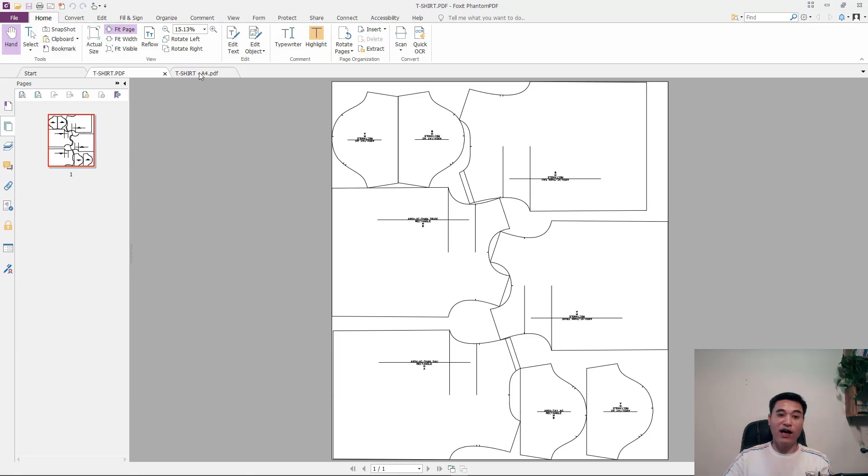And once we've finished assembling, this diagram will be at a 1-to-1 scale, just like how we designed it on the computer. Whatever size we designed, when we print it out and piece the A4 sheets together, it will come out exactly like that.

Hello everyone, today I will share with you how to print a pattern from the Gerber software onto A4 paper using a printer. There is a simple method to do this.

We will start by opening up the specific layout design that we need to print on the standard A4 size printer. After printing out the individual A4 sheets, we can carefully piece them together to form the full pattern exactly as we want. This method is for those who do not have a plotter. But if you have a plotter, then there's no reason to use this method, right?

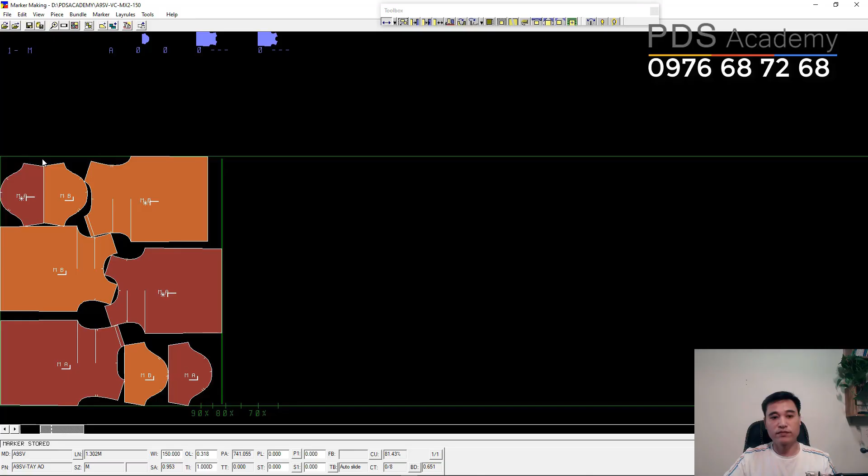So now I will show you how to do it. You will go to File. Then we go to Send to Plot. Once you click on the Send to Plot button, a configuration window like this one will pop up on your screen. From here, you can choose the specific folder path where your PLT file will be saved.

We will set a path for the .plt file, also known as the .hpgl file, to be saved to any location we want, all right? Then we go into View. You will go into Plot option. Here we will check the .hpgl option. Remember to check this box.

After that, you will click on Default to choose a path. Here, for example, I will set the file to be saved to the desktop, and you can try doing the same. After that, we will click OK.

Next, if you want the file name of the diagram you print to be long, you can check the long file name option. Then we will click OK. After we click OK, you will see that the export section now has a path leading to the desktop. Can you see it? Here it is.

Next, you will select the annotation section. In this section, you can determine how the notes will appear on the details of your project. Click on the button on the right-hand side. From there, you can choose any type of annotation that you have been using for your work up until now. Here, on my computer, I have this option, so I will select this one. If your computer has a different name for it, you can choose that instead.

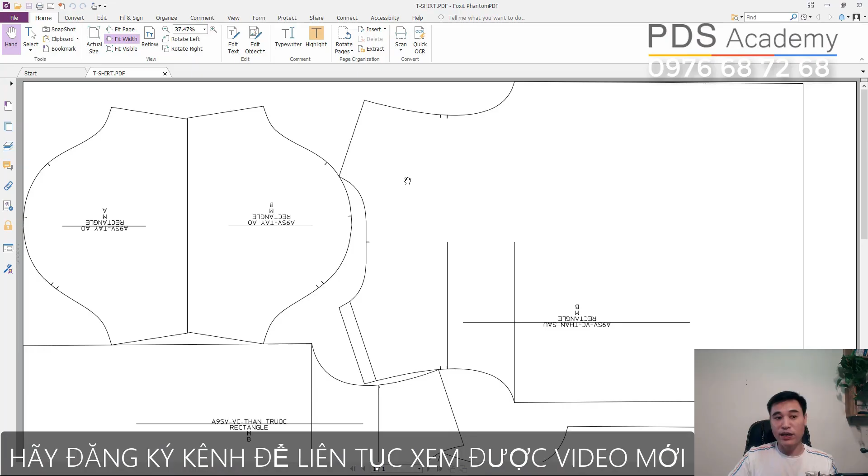So right away, you can see here, right outside our window, there is now a PDF file, and its scale is exactly 100% compared to the scale in the Gerber software. So now, how do we print this file so that it becomes multiple A4 sheets that we can piece together? Because this is a 1-to-1 scale, we can't print it directly onto A4 paper, right? So here's what you should do.

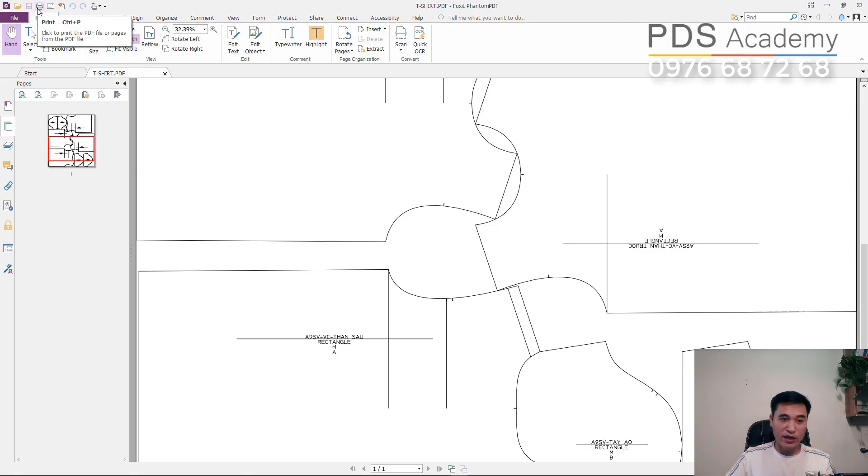You will click on this printer option, and you can see it very clearly right here. There is a label that specifically says Foxit PhantomPDF Printer. Look here, it has this label, so click on it. Make sure to check this specific box.

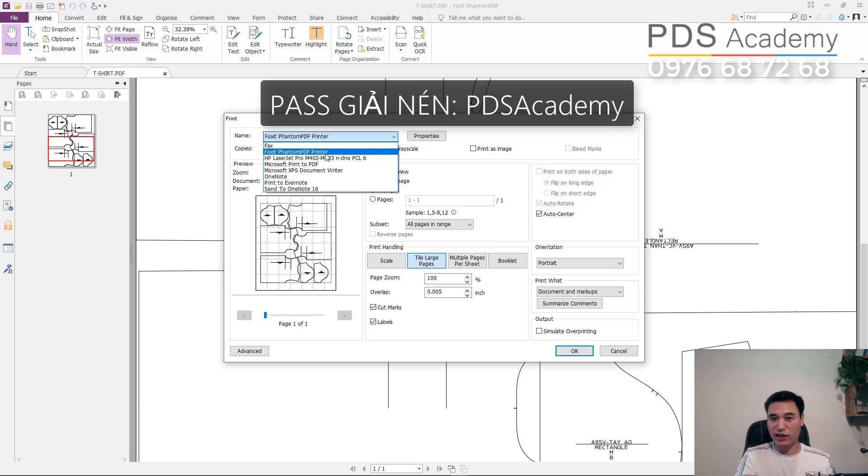And now we're going to select Foxit Phantom. Look to the right and select Property. And here, choose the Layout section. Select the paper size you want. For example, if you want A4 paper, then select A4 paper. You can choose the unit as either centimeters or inches. It's up to you. And the size of the A4 paper will appear here.

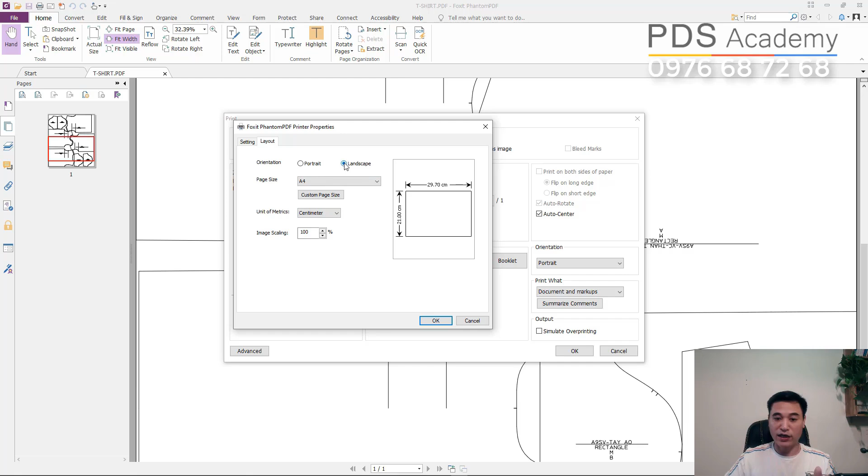And if you want to print with the paper in landscape orientation, just check this option and your paper will be set to landscape, okay? And now click OK. Next, make sure to check all pages so that it will print all the pages. Continue down to the section below and check this box. This will split your diagram into A4 sheets. Remember, you have to check this box.

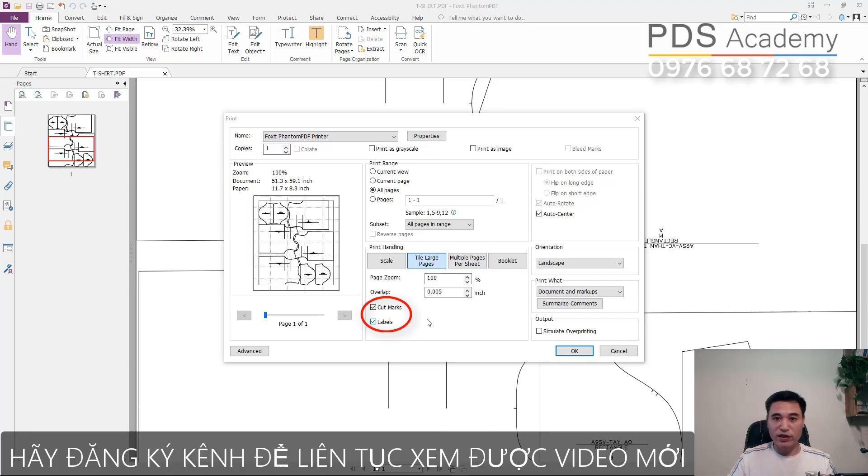And if you want each A4 sheet to have alignment marks so they fit together, check these two boxes. Check both of these boxes. And here you can count how many A4 sheets you need to print and assemble together to create this pattern diagram. Do you see that? Next, you just need to click OK, and please wait a moment.

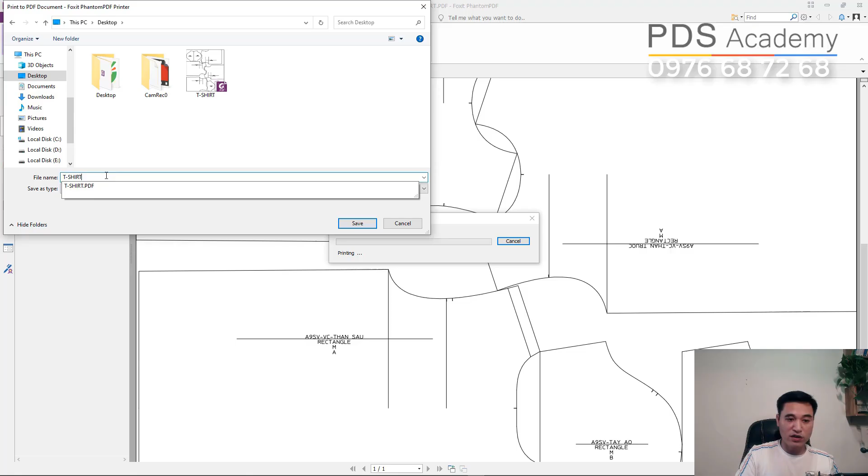A new window will automatically pop up for you to save this file. For example, I am going to save it directly to the desktop, and I might name it t-shirt, but as an A4 file. I can save the file just like this. Then I click Save. At this point, you can see that a brand new window has appeared here. And now we'll click on the View section to properly display all of these pages.

You might want to zoom out a bit. You will click the button to zoom out a bit so we can get a better overview, right? So we need this many sheets of paper. See, do you notice? With this many A4 sheets combined together, that's how we get this diagram. I'll zoom out a bit for you to see. See, do you see it now? This is the diagram that summarizes all the details.

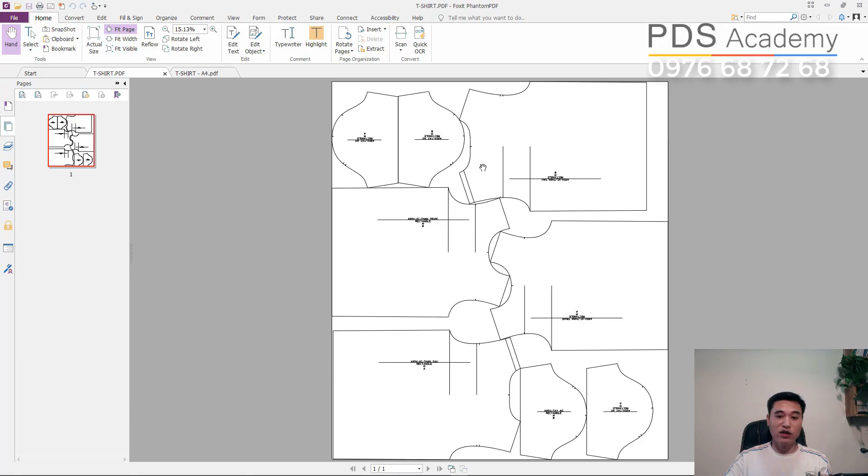And this is the diagram that will be split into individual A4 sheets. And when we print them out and assemble the A4 sheets, we should also print this small diagram here so we can refer to it and assemble everything accurately. On every single one of these sheets, I'll zoom in a bit to make it easier for you to see. On each corner of these sheets, there are markings to help us align them together. Can you see that? And it numbers the pages. See, it labels which row and which column right here, so we can easily assemble them

into a complete diagram. And when we finish assembling them, our diagram will be at a true 1-to-1 scale, just like how we designed it on the computer. Whatever dimensions we set, when printing and joining A4 sheets, it's exactly that. And that's how I print from the Gerber software onto A4 paper. It's really that simple.